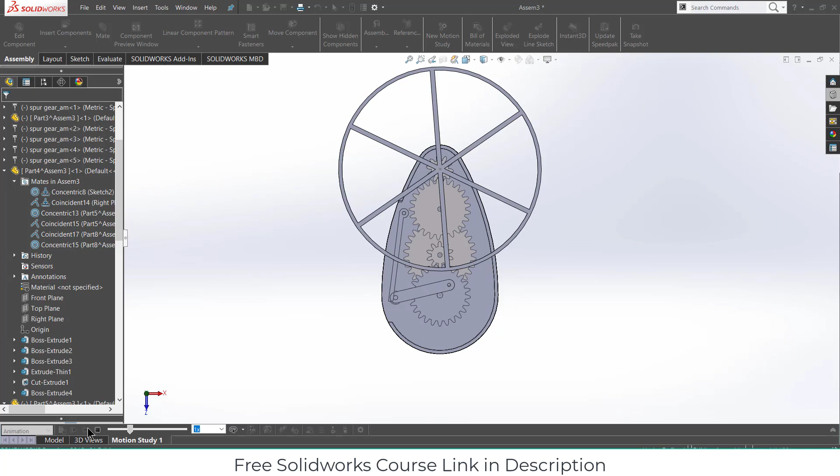Let's start. Click on design library, click on spur gear and drag it. I'm using a library that already contains all the gears. The first gear I'm using is module 2 with number of teeth 25. Click OK and click close.

Select this face, press Ctrl plus 8, go to the sketch, click on sketch, click on convert entities, press Ctrl A, press Ctrl C to copy the sketch. Click yes, click OK, exit the sketch mode.

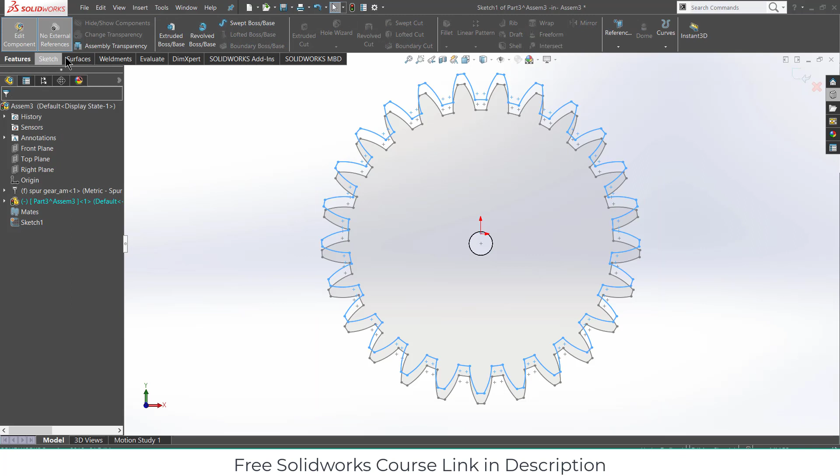Go here, click on new part, select the right plane, press Ctrl V to paste the sketch and extrude it up to 5 mm, click OK.

After that, go to the sketch, click on sketch, select this face and draw a circle here of diameter 5 mm. Go to features, click on extrude cut through all, click OK and delete the sketch.

Delete. So now we have two gears - one from the design library and another that we made ourselves. You might ask why I made this gear instead of using the library one. The reason is I'm going to do some modification to this gear, and if I modify the design library gear directly, it will mess up my whole library. That's why I'm not modifying the design library gear.

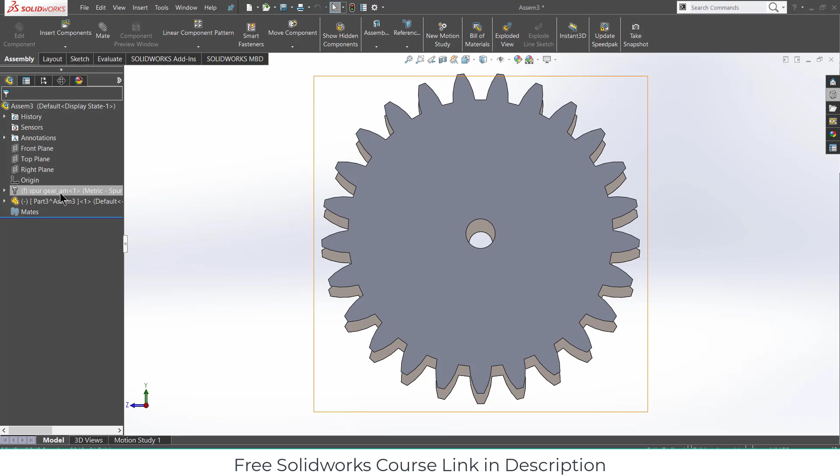So drag this part, and we are going to use this part from now on. As you can see, this part is fixed and cannot be moved, so right click on it and click on float, and now we can move it.

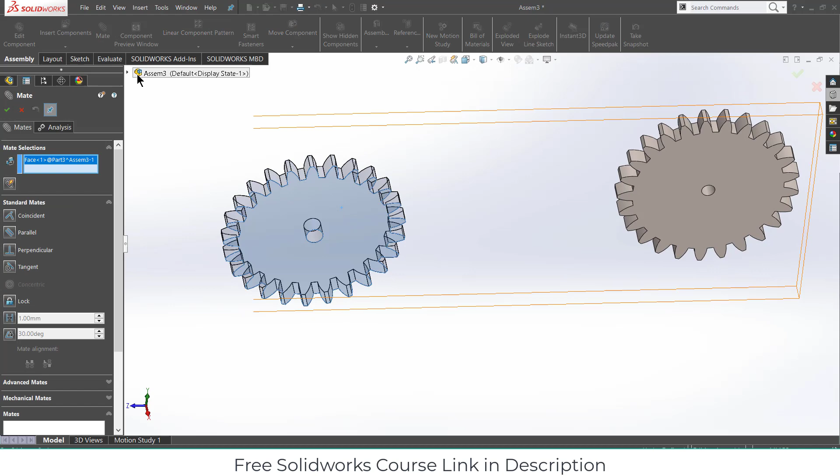Before I start making it, the first thing I have to do is go to the top plane. Select this face and select the top plane, click OK. Now select the right plane, press Ctrl plus 8, right click on it, click on sketch.

Before I start making it, I need to draw some lines that represent the axis of my different gears, so that when I do mating it will reduce my work. I need these lines importantly, because when I was trying to make this the first time, it was just a mess to do the mating work. That's the reason I'm making these lines.

Don't worry, I will tell you how I calculate the distance from here onwards. So this one will be 50 plus 20 divided by 2, which is 35. Okay, so that's for all.

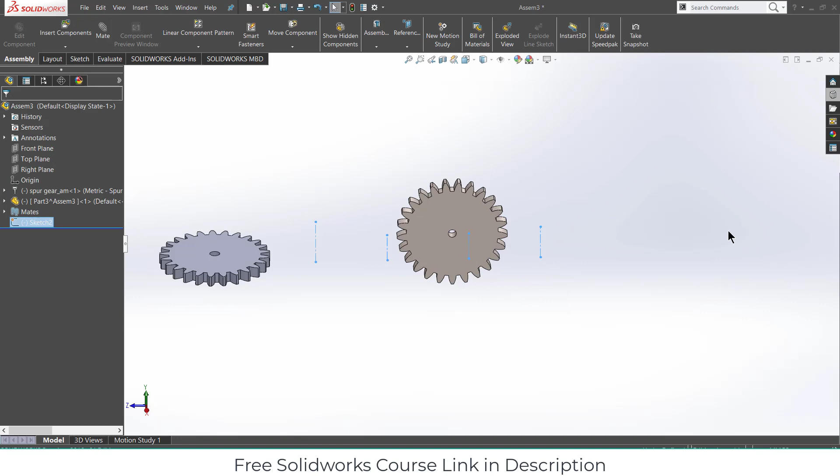Now let's start work on the mating. Select this face and select this, click on OK. Go here, right click, click on edit features, click on concentric, click OK.

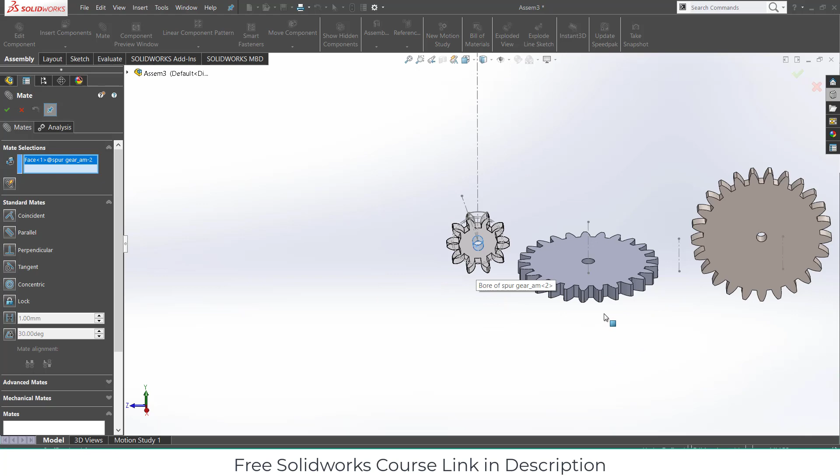Now what we have to do is make another gear. Go here, add another spur gear. This time the number of teeth on this gear is 10. Click on 10, click OK, close it, go to mates, select this face, select this one, click OK, select this face and this face.

Select this face, press Ctrl plus 8. As you can see, OK. Right click on it, click here and make it concentric. Click OK.

So move it here. Now we have to define the gear mate. Go to mates and check this, go to mechanical mates, click on gear, select this face, then select this face. Instead of diameter 5, we will enter the value of 50. If I try to do animation, yeah, it's very fine.

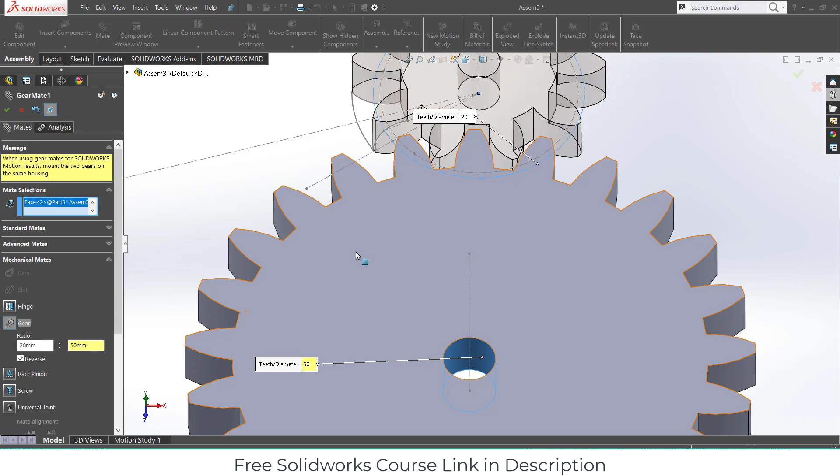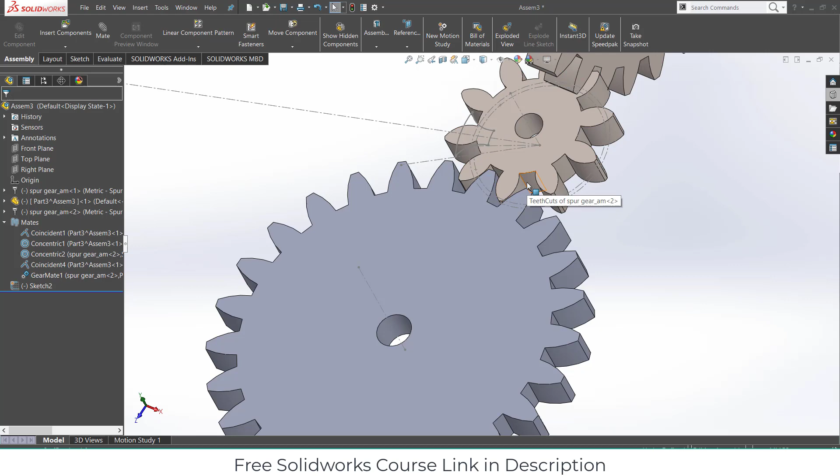Click OK. Now the question is how I calculate the distance. The distance formula is quite simple: it is diameter of 1 divided by 2, plus diameter of 2 divided by 2, so radius 1 plus radius 2. As we know the module of our gear is 2, this gear has 25 teeth, so its diameter is 50, and this gear has 10 teeth, so its diameter is 20. 50 plus 20 is 70, divide by 2 is 35, because I want the center distance, not the whole. It's just simple math, nothing out of the blue.

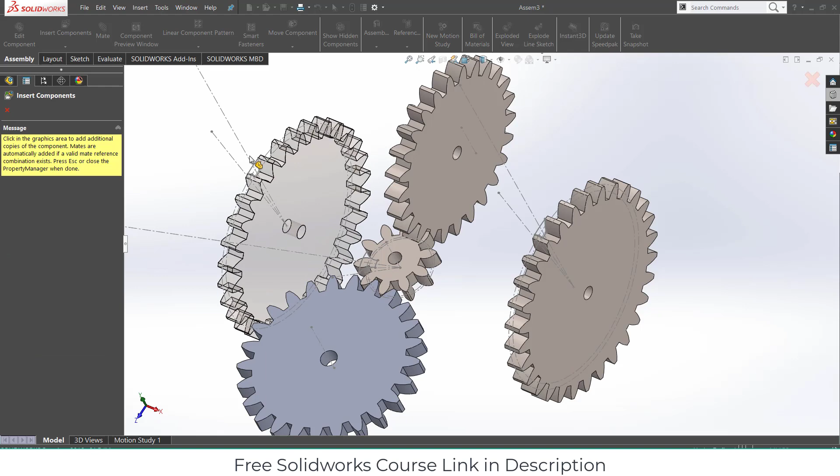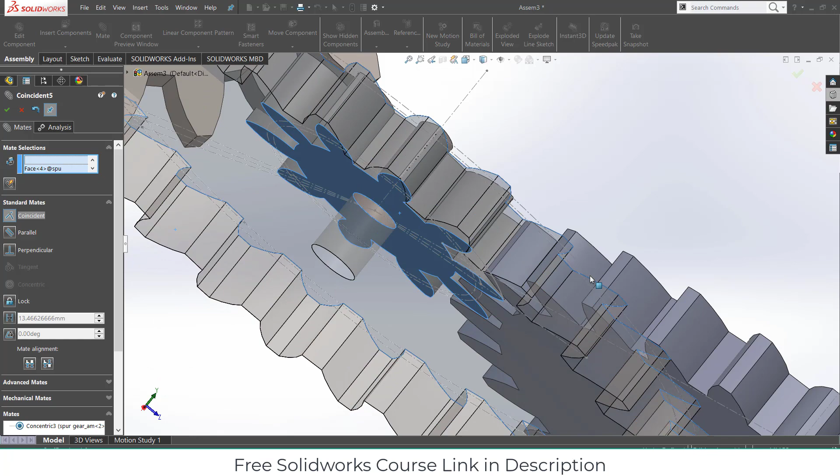Now go here again, drag and drop. This time the number of teeth on the gear is 30, and make sure the face width is 5. Close it, go to the mates, select this gear, and while mating this, make sure you click on lock rotation. It is very necessary. Click OK, drag and drop it down, select this face and this face, click OK.

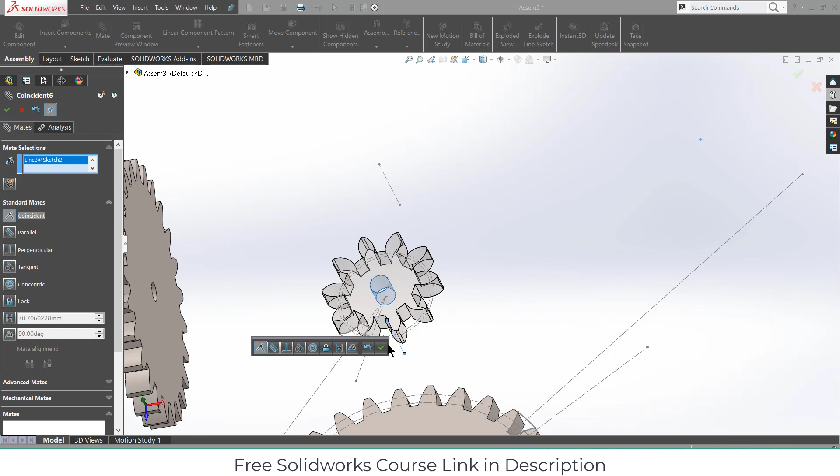After that, we need another gear with 10 teeth. So instead of dragging there, simply press Ctrl and left click on your mouse, drag this gear, and move it aside for a bit because we don't want it yet. Go to the mates, select this gear, select this gear, make sure you use concentric. Click OK. Select this face and this face, click OK.

Select this face, press Ctrl plus 8, go downwards and rotate it. Now go to the mates, mechanical, gear, select this and this. Just when you try to do mating, you might not see this sketch in your design assembly.

So how can you bring it up? First click close. What you need to do is select this gear and go here, click on tooth cut, right click on it and click on show. As you can see, it is hidden now. If I right click on it and click on show, it is showing. So this is a very easy way to do gear mating, and it works quite well in most cases.

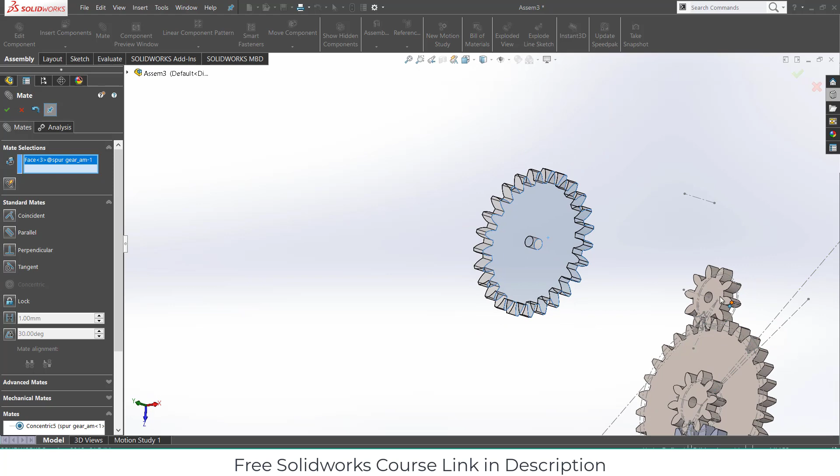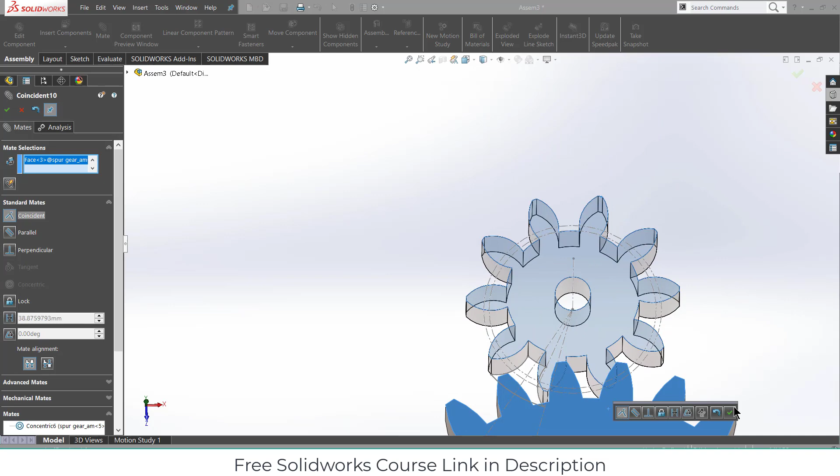Go here, mates, select this and this one. Make sure you click on lock rotation, click OK, select this face and this face, click OK. Now I need again a gear with 10 teeth. By pressing Ctrl and left click on mouse, drag it, go to the mates, select this one and this one, click on concentric, click OK, select this face and this face, click OK, move it, rotate it a little, click OK.

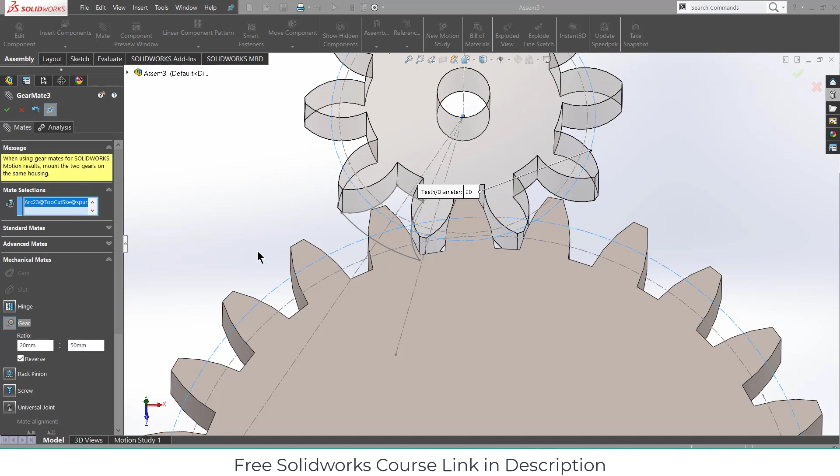Select this gear, go here, tooth cut, right click, click on show, go to the mates, select this one and this one. Sorry, first go to the mates, click on gear, just check a bit that it is working fine. Yeah, it is working fine, click OK. Now hide these unwanted sketches because they are just an unwanted burden, and select this one, right click, hide. This done.

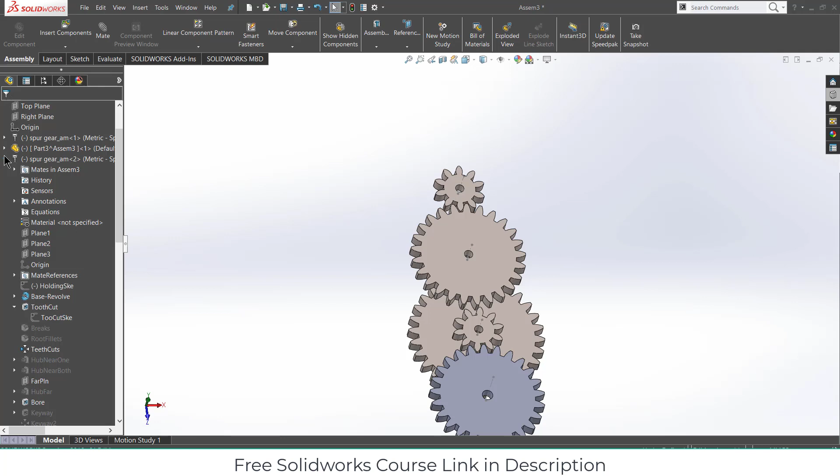So we have made all the gears. Now the next thing we have to do is make the covering of this, and after that we will work on the mechanism. So go here, click on new part, select the top plane, press Ctrl plus 8. Let's see how we approach this problem.

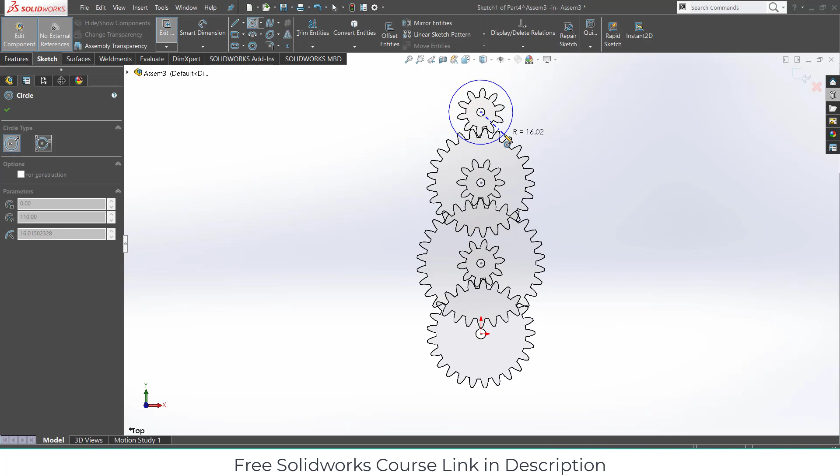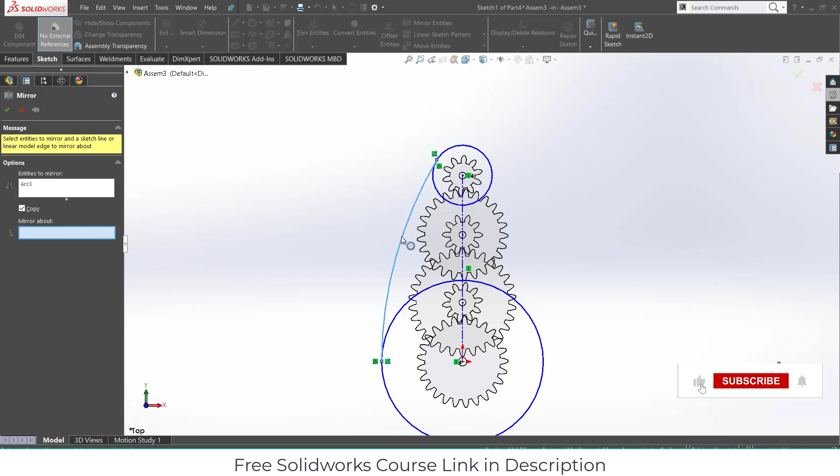Go here, draw a circle here, draw a circle here as well, select this, and instead of that we will use an arc, it's better for this. Escape, select this and this, make it tangent, select this and this, make it tangent, and select this point and this point, select this one and this one, make it vertical. Mirror, select this and mirror about this line, click OK, go to the features.

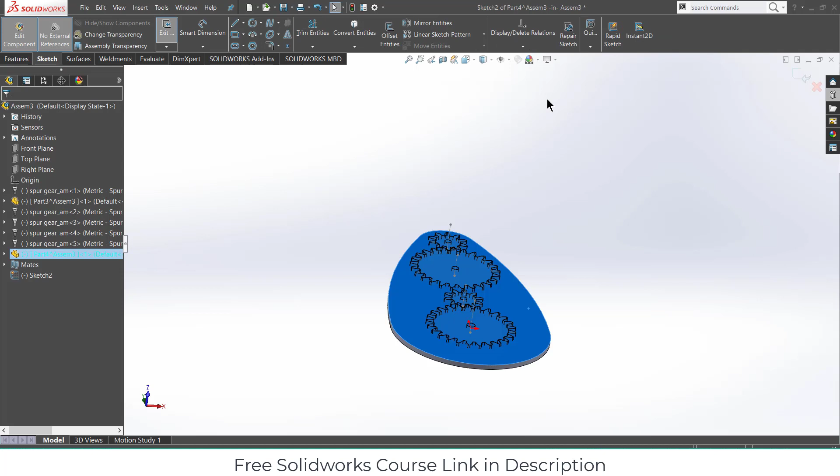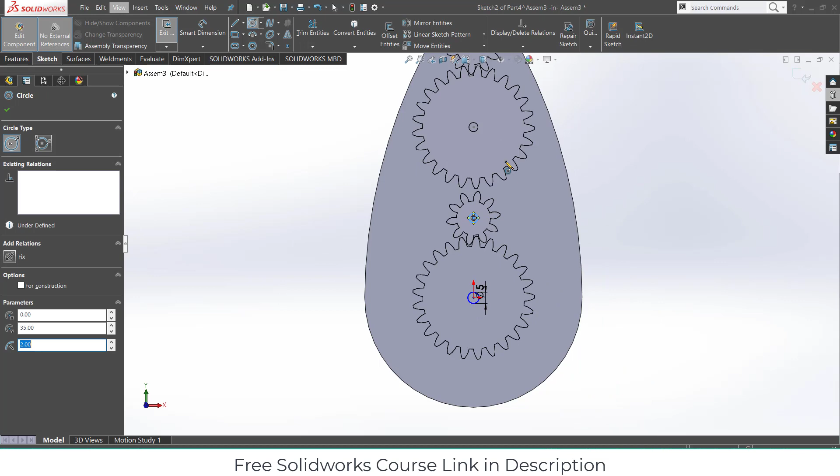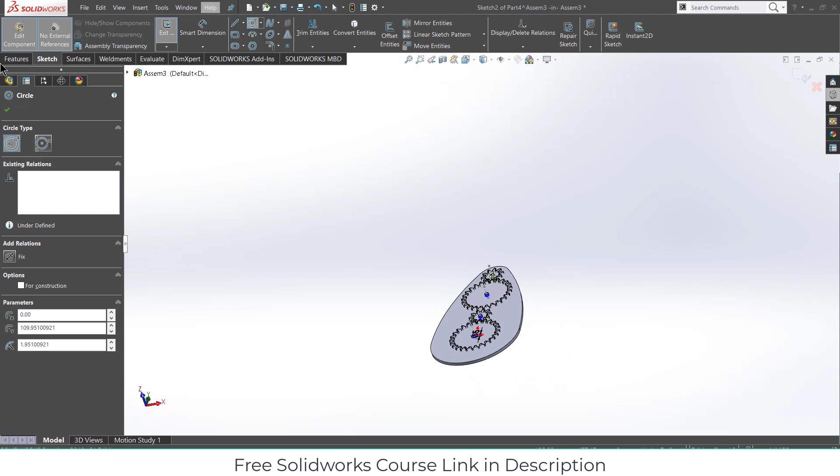3 mm, click OK, and after that select this face, right click on it, click on sketch, press Ctrl plus 8. So we have to make the pins here, so 5 mm, and go to the features, extrude up to 20 mm, 20 mm. 20 mm is too big, make it 10 mm, sorry. Edit the existing component mode and drag it downwards.

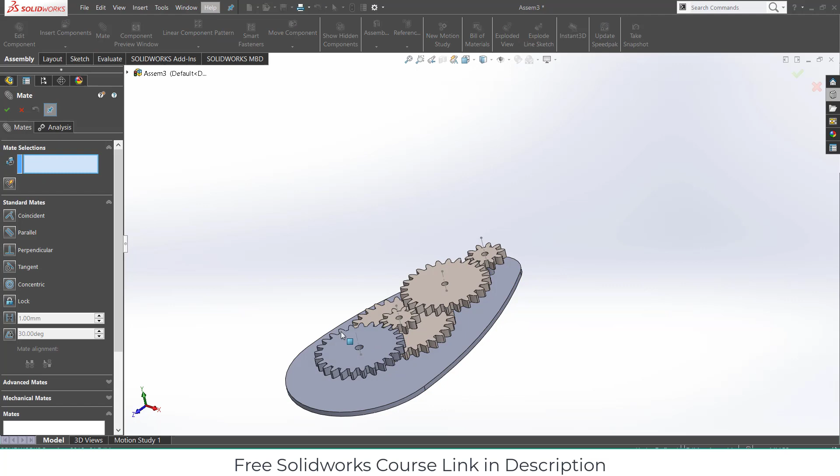Go to the mates, select this face and this one, make it concentric, click OK. Similarly select this face and this one, make it concentric. Okay, it is not doing concentric.

Now we have to make the outer body of it. Select this gear, click on insert components. Before I make it, let's add more things here.

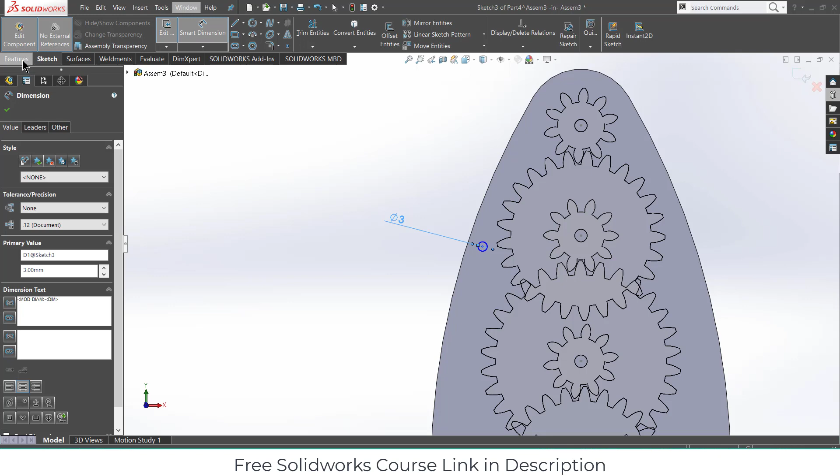Draw a circle here, 3 mm. Go to the features, extrude up to 10 mm, and select this face, click on sketch, press Ctrl plus 8, and select the outer edges by pressing Ctrl.

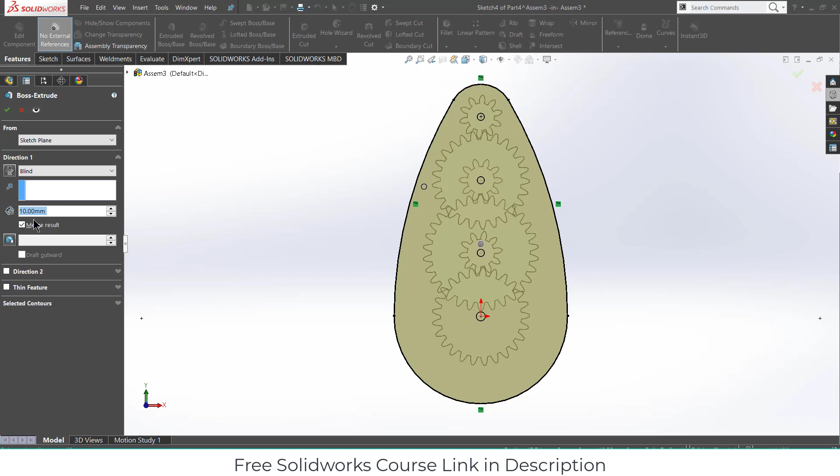Click on convert entities. Select this one, convert entities, extrude, thin feature, 3 mm, direction 2, 3 mm, click OK.

Press Ctrl plus 8. So just so you know, we are going to delete some areas here because we want some rotation here. So let's see how we can approach it.

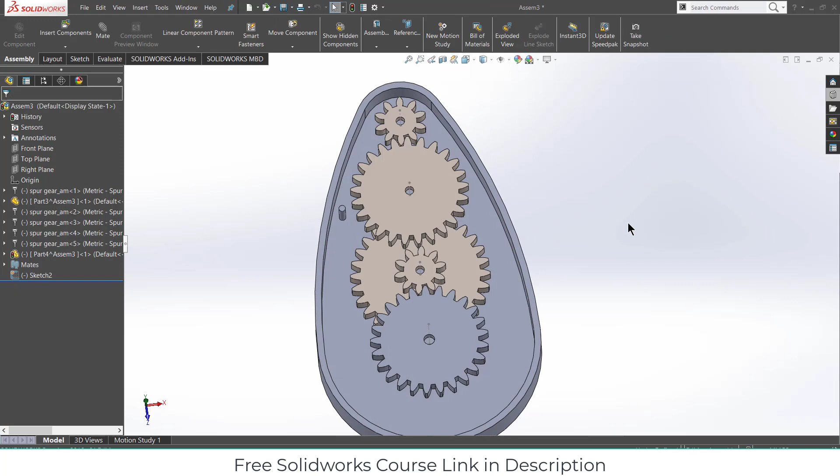Edit assembly component mode, select this face, press Ctrl plus 8. After that go here, click on new part, select the top plane again.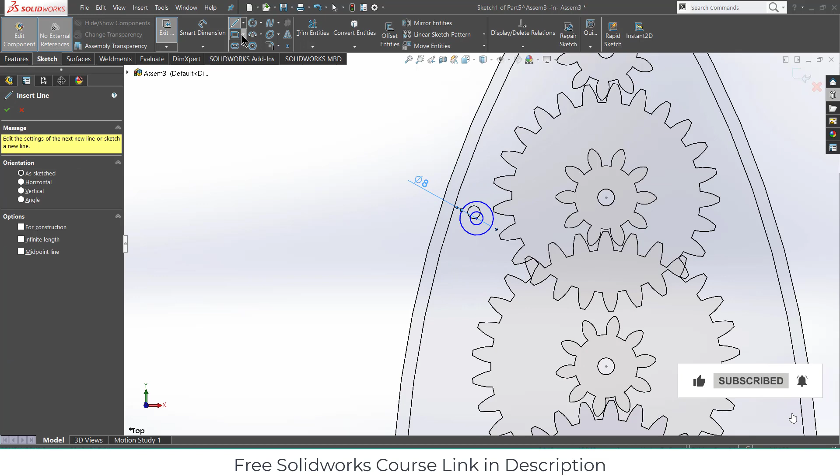So what I can do is go here, click on parallelogram. Select this point and this point, and to this point.

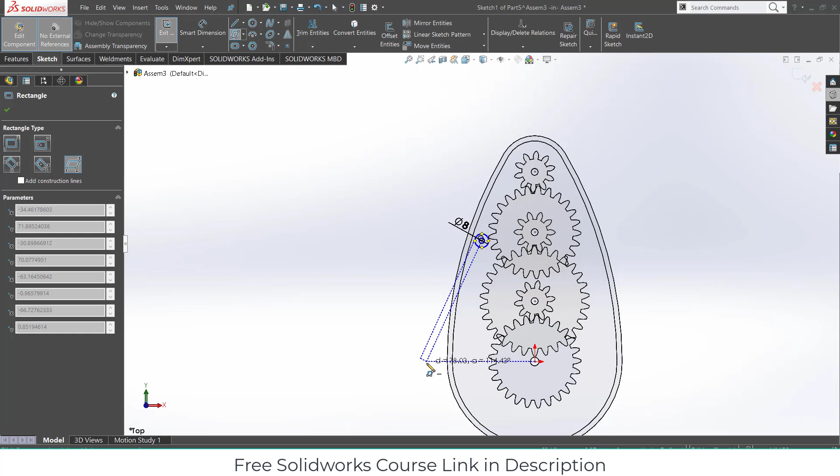Go to the features, click on extrude, select this face and this one, click OK. Select this face, click on, press Ctrl plus 8, click OK.

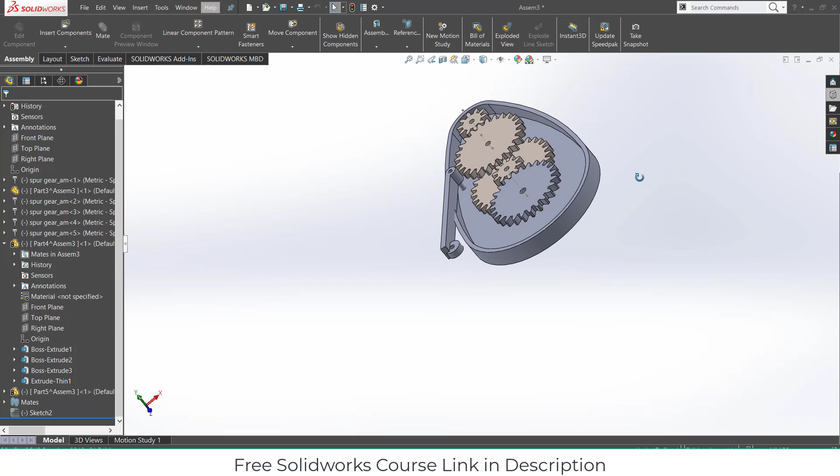Select this gear, click on edit components. Just remember that this gear is made by us, it is not from the design library, so you can do modification on it. So select this face, click on sketch, press Ctrl plus 8.

So draw a circle here, smart dimensions 3 mm. Select this and this, make it, press escape, select this point and this point, make it horizontal first, press Ctrl Z. Forget about it. You see that the gear has x and y axis, so if I try to do horizontal it will move down here. So this is what I want.

So go to the smart dimensions, make it 12 mm, go to extrude cut through all, click OK.

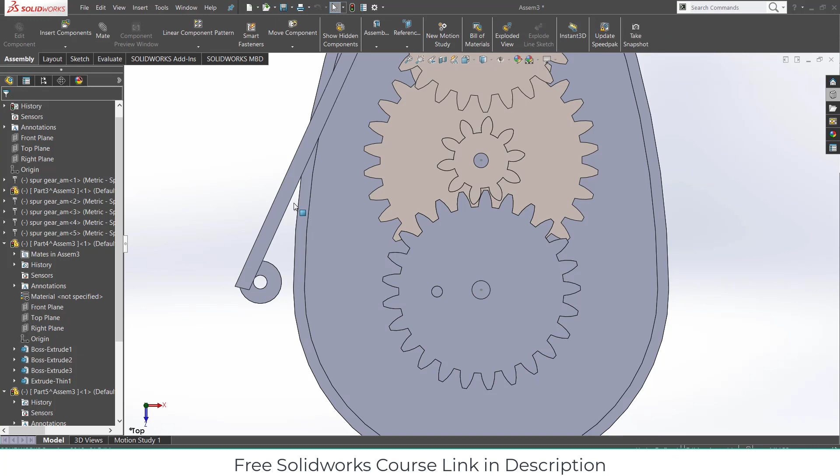Exit, there's some component mode, click on here, click on new part, select the top plane. So this is going to be our last part—not the last part, sorry, we are still going to make more parts after that.

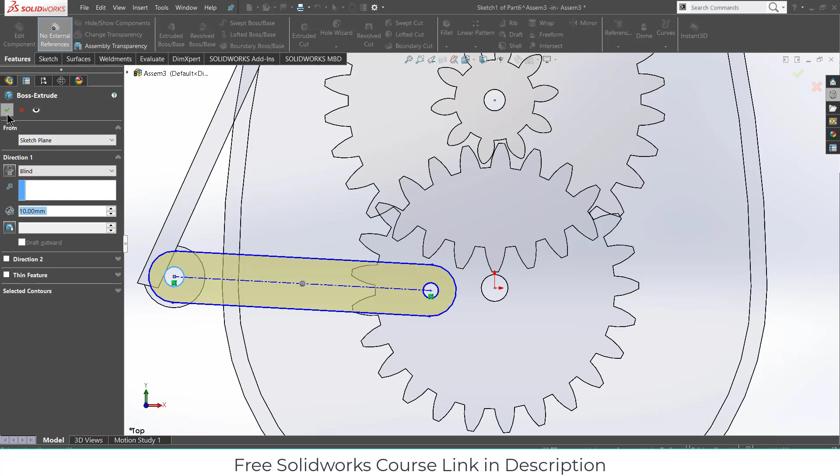10 mm, okay, exit the assembly component mode. Now we have to do some matings. Oh, before we do mating, click on here, and we need to control this extrusion.

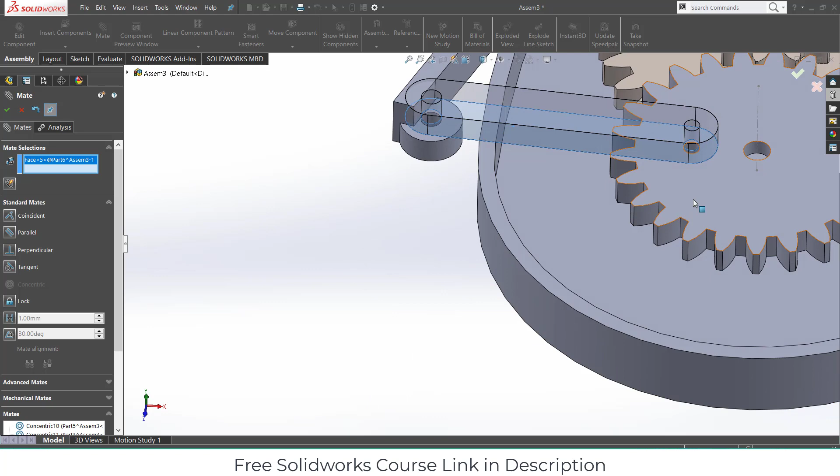So let's see, first of all let's see whether it's working or not. If I try to rotate it, okay, I have to go to the assembly, mates, select this face and this face.

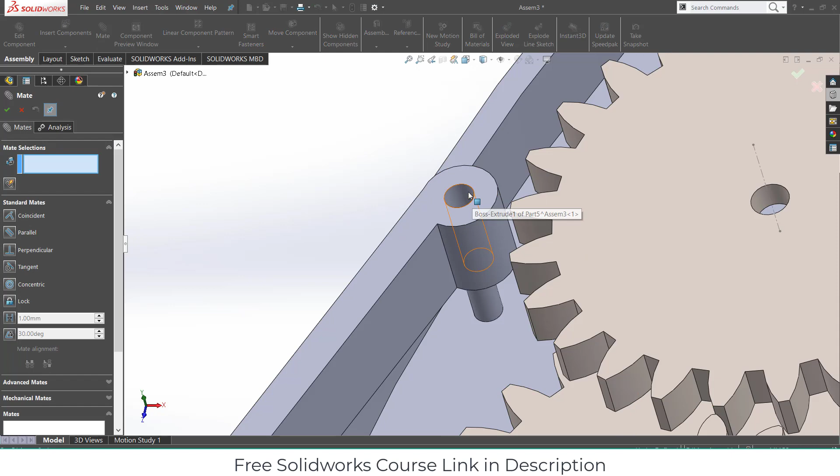One more thing is that it is rotating as well, so we have to control it. Select this one, let's see, select the right plane, go to the mates and select the right plane of the assembly, click OK.

So if I try to rotate it, as you can see, it's working quite great.

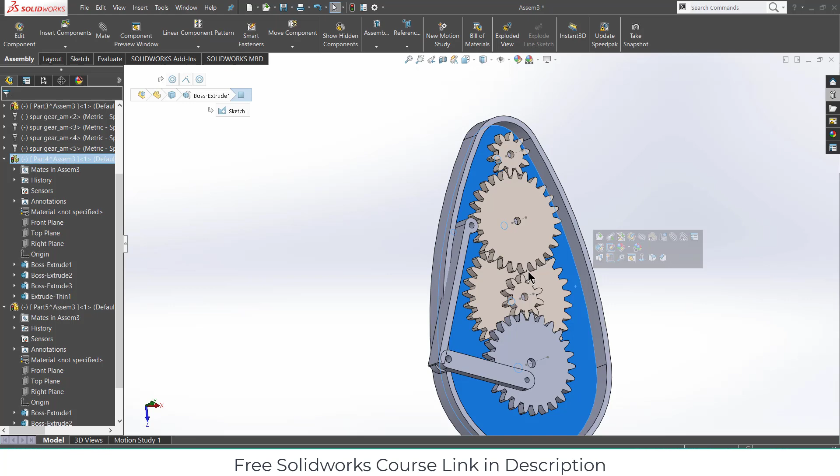Now one thing we have to do is delete this unwanted area, because as you can see they are interfering, and here also there's interference. So we have to delete it. Select this one, click on edit components, select this face, click on sketch, press Ctrl plus 8.

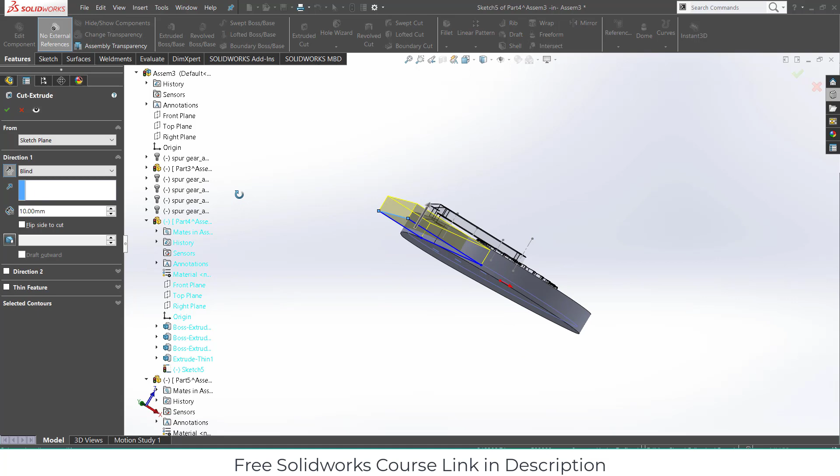There are a thousand ways to do it, again it's up to you how you want to delete it. Extrude cut, reverse direction, click OK.

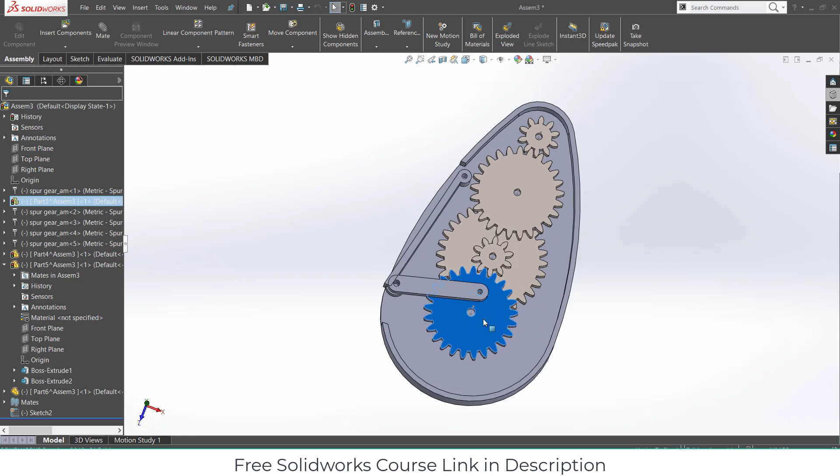So this looks great to me. Now we need a covering of it, so we will make the cover later onwards. We need a fan on top of it. Fan work, I think anybody can make, but still, I'm making a tutorial, so I will make it.

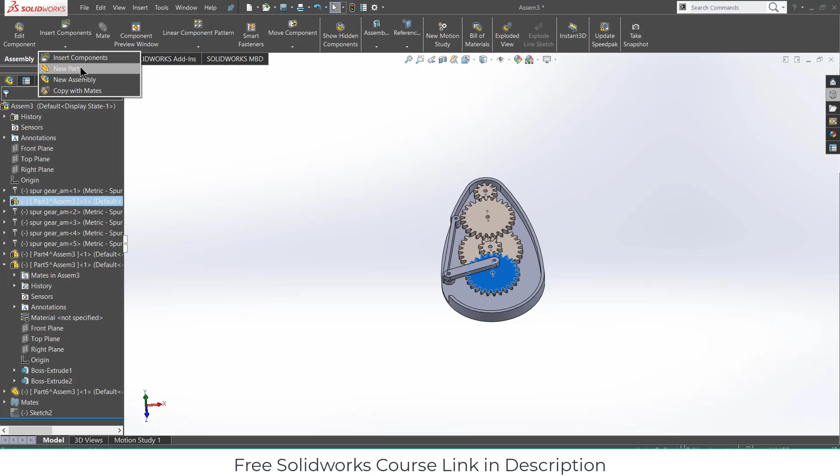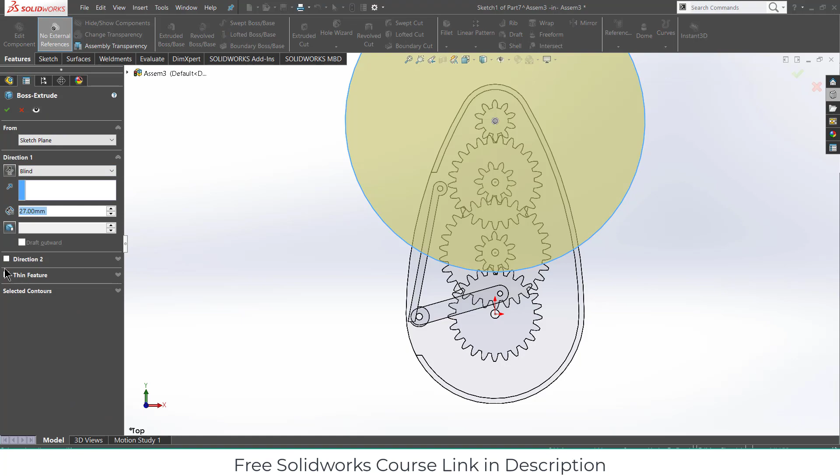Click on here, new part, top plane, press Ctrl plus 8, go to the features, extrude it, thin feature. Why is this error popping up? I will see later on why this error is here.

Okay, so we need one more. So select this face, click on sketch, press Ctrl plus 8.

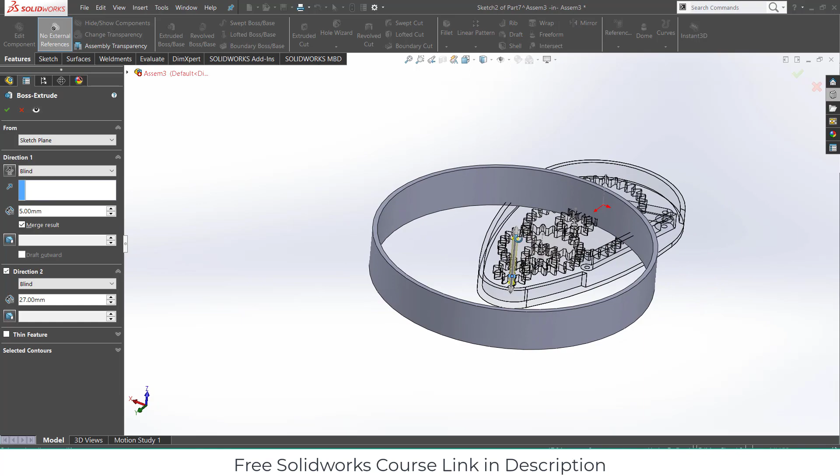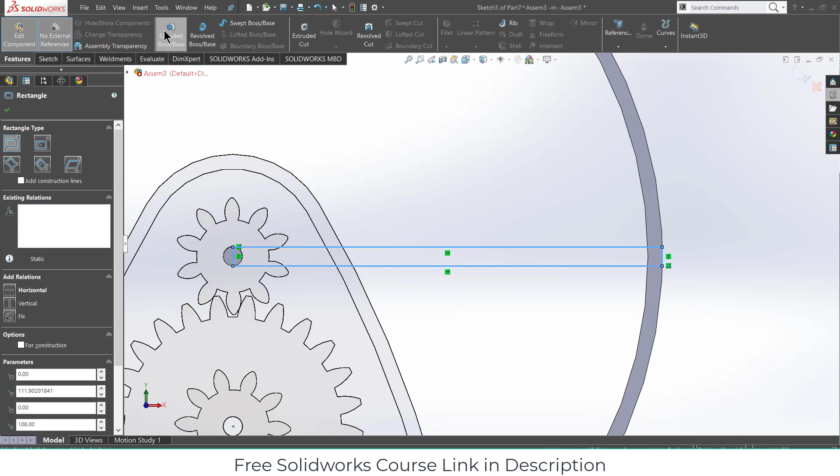Okay, reverse direction, 10 mm. You can make it an inclined angle as per your requirement, but I'm not making it inclined. My main aim is just to show how to make it. Okay, so increase, click OK.

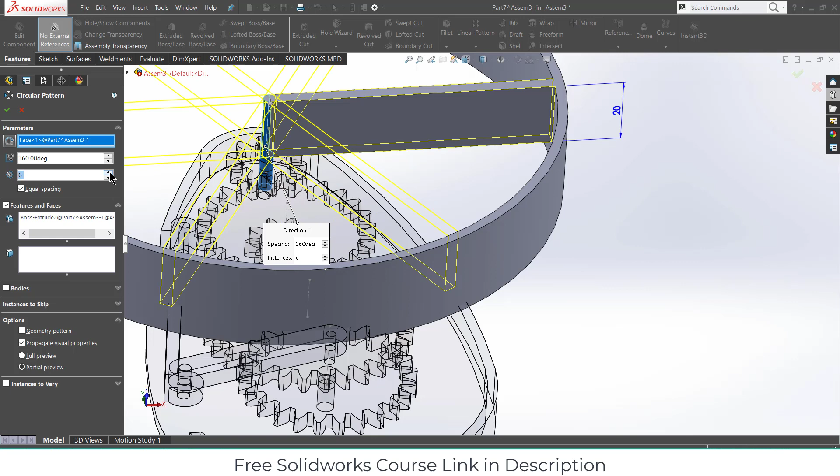Exit component mode. Okay, now let's see where is the error. One of these entities may suppress and no longer exist. Why?

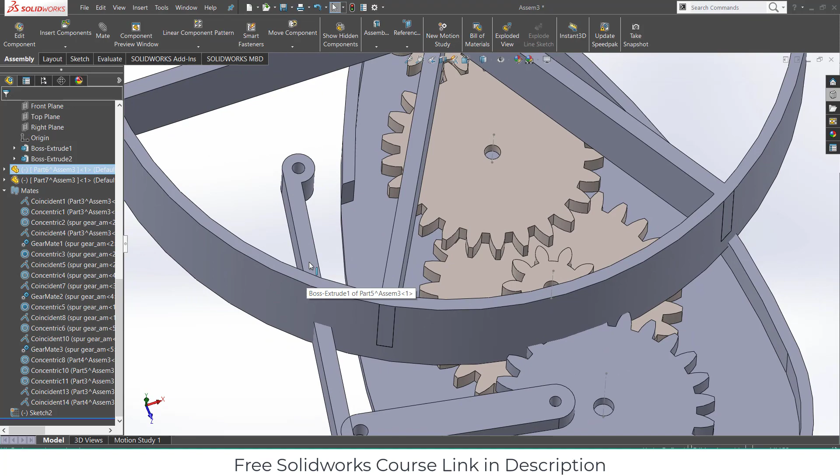Delete that. Okay, actually the sketch is deleted from here, so that's the reason we got the error. So press Ctrl Z again. So we have to make a sketch here. Go here, click on edit component. Remember the cut that we have made, so because of that cut, I accidentally deleted the sketch here as well. That's the reason I'm getting the error. So that's the important thing, that you know why I'm getting the error and how to resolve it.

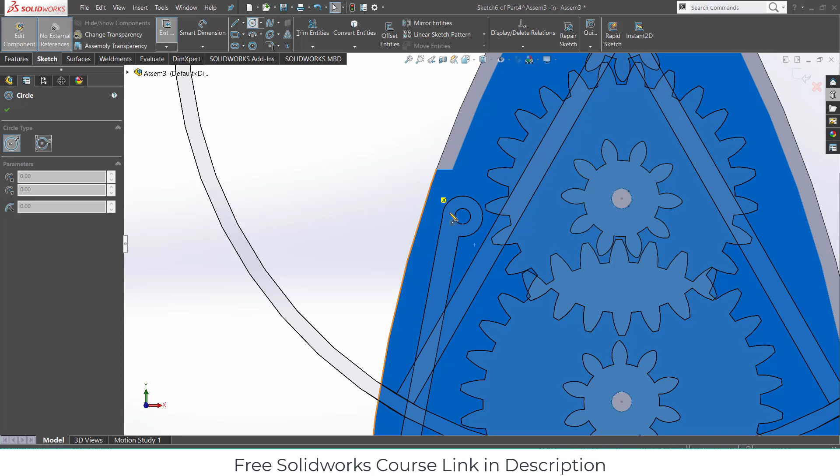10 mm. Now go to the mates. Select this and select this one. Click.

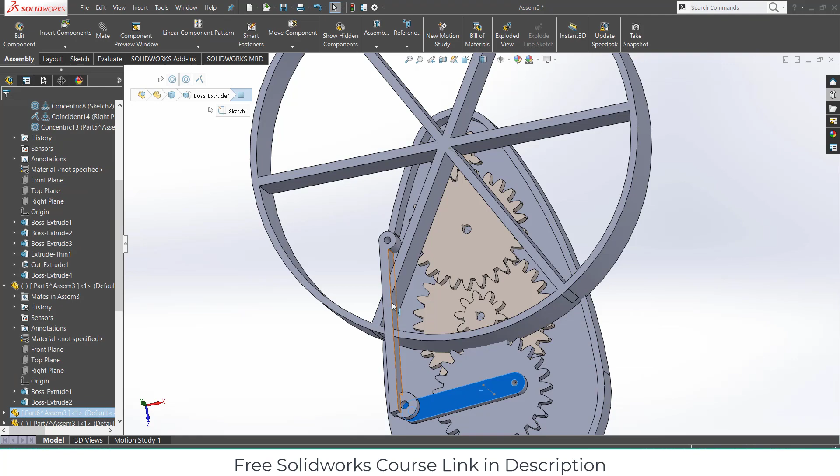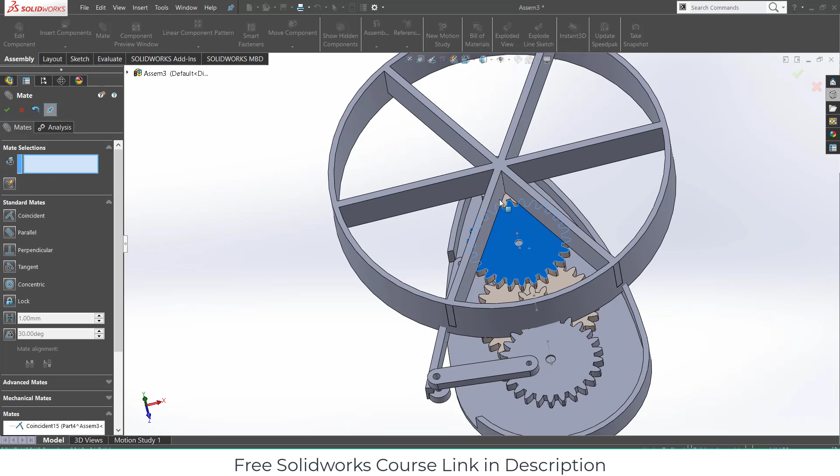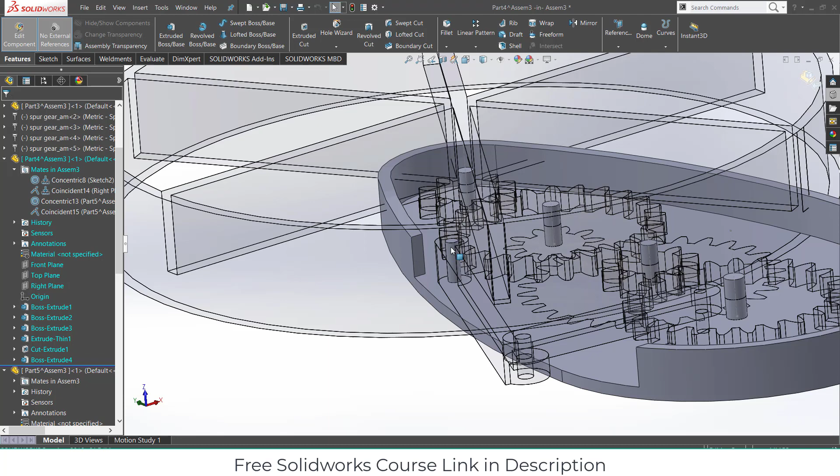Select this gear, click on edit, right click, features, rebuild it.

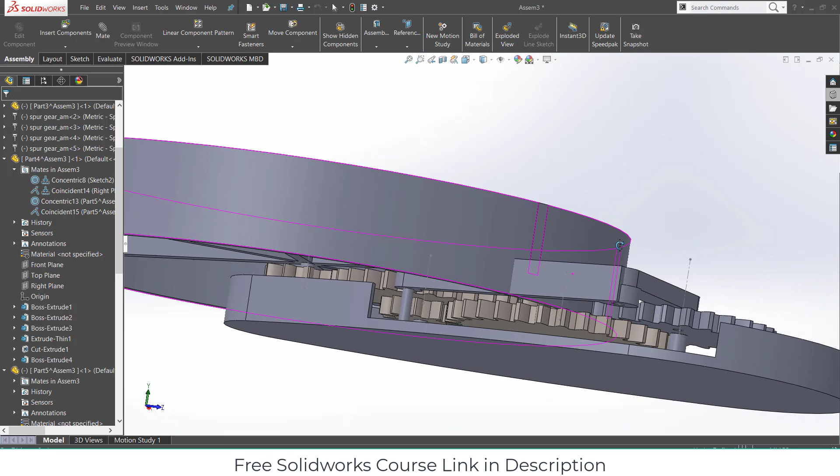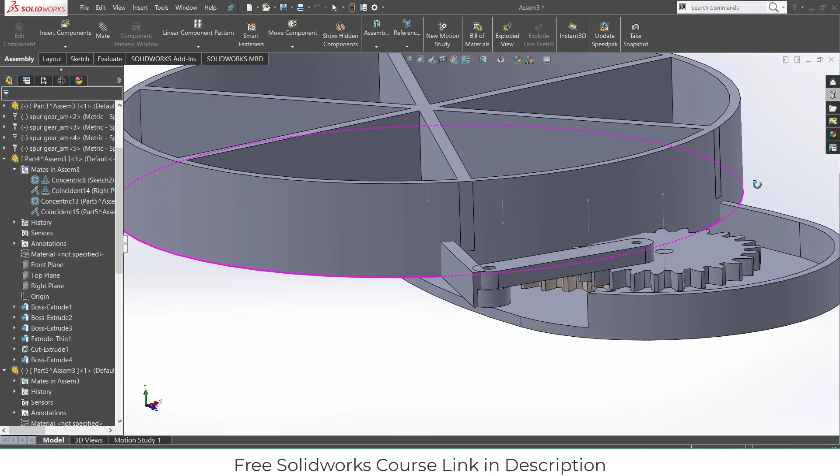15 mm, I guess I made it too big. Exit it. Move this upward. So if I try to, as you can see, it's working fine.

Now let's do some other mates. Go here, select this face, click on lock rotation, click OK, and move it downward. I guess up to this is fine. We can add some mechanism here if you want. Okay.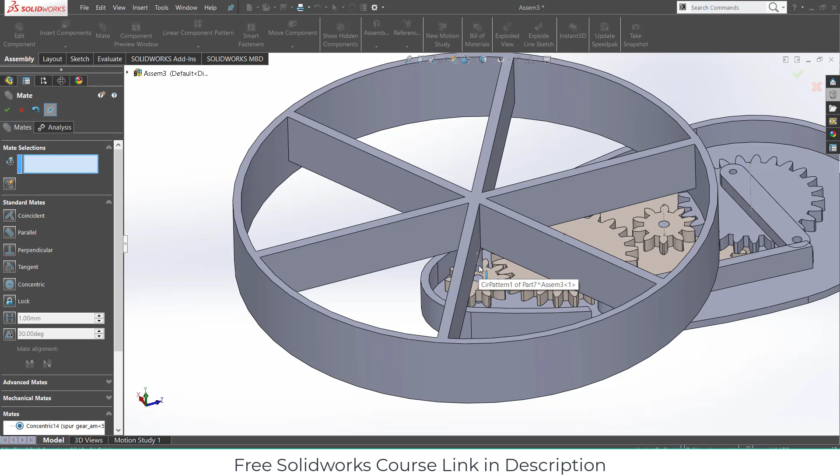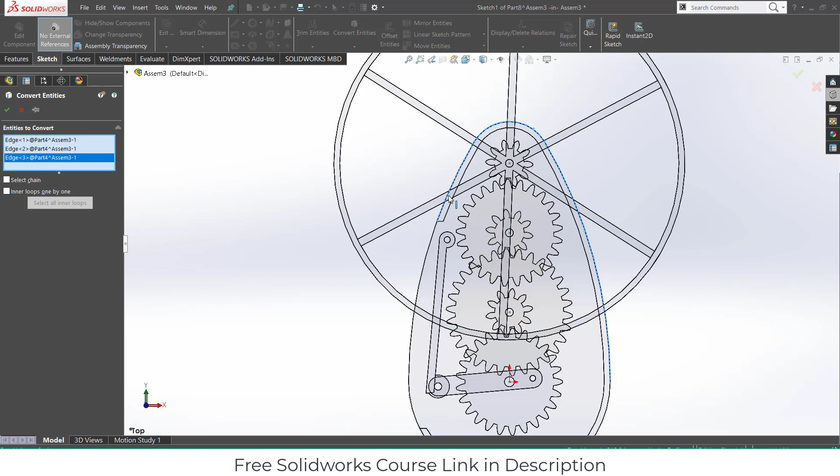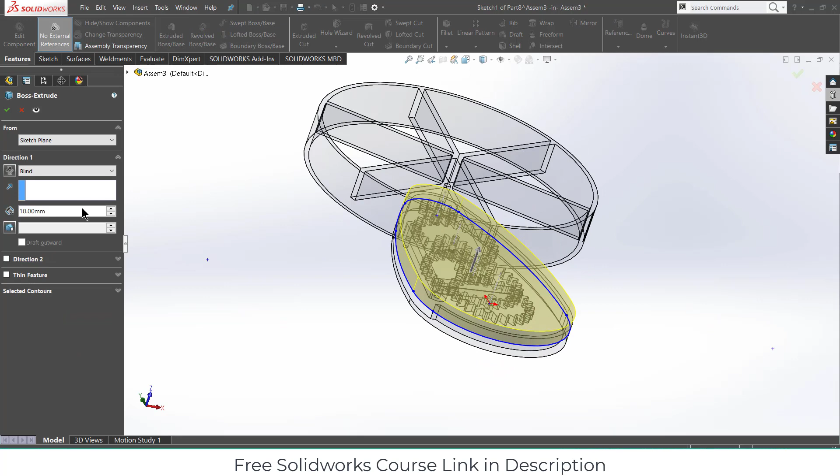Now we want to cover all these things. So what we can do is click on here, click on new part, select the top plane, press Ctrl plus 8, click on convert entities, select this edge, click OK. OK, don't show again, click OK, extrude it, 3 mm, click OK.

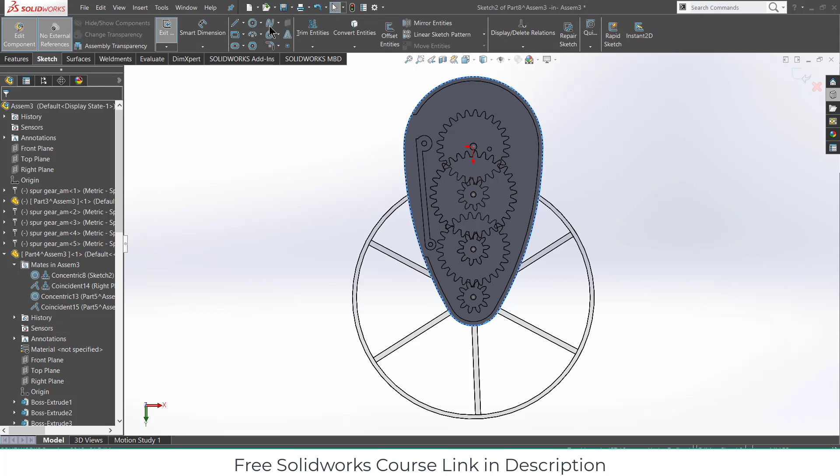Select the bottom of the face, click on sketch, press Ctrl plus 8. Again by pressing Ctrl select all the edges, go to the features. Okay, I have to first convert the entities. Now go to the features, extrude it. Thin feature is 3 mm, inside it, let's make it 5. Okay, exit component mode.

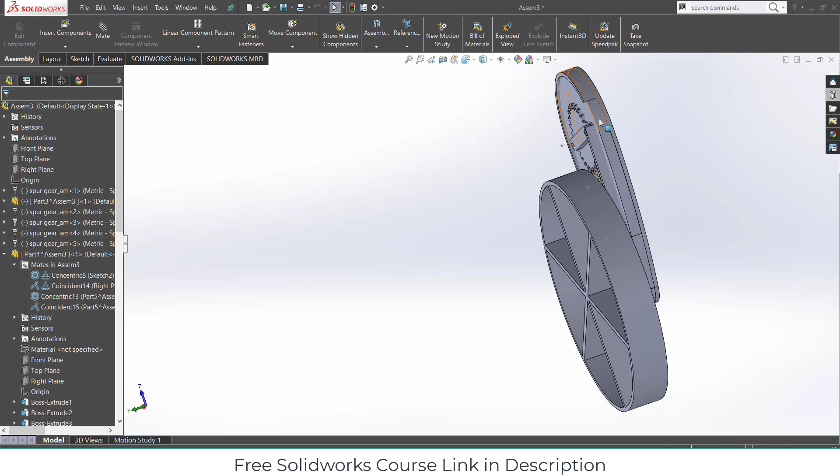As you can see, it is quite tiring.

Select this face, click on go to edit assembly, select this face, click on sketch, press Ctrl plus 8. We need to draw a circle here so the hole is going through it. Extrude cut through all, click OK.

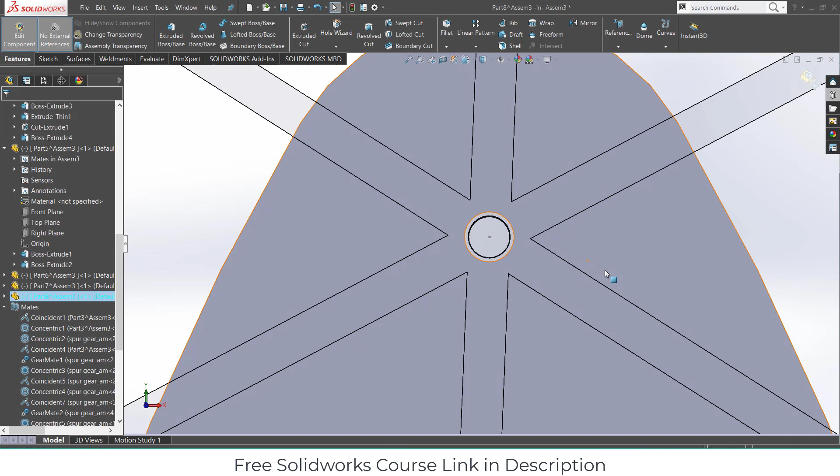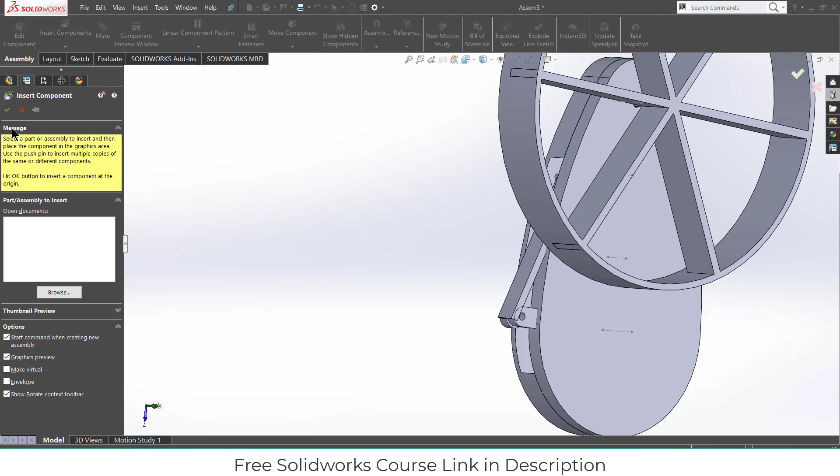And we have to delete some area here, so what we can do, select this part, click on edit component, select this part, edit components, select this face, click on sketch, press Ctrl plus 8, extrude cut.

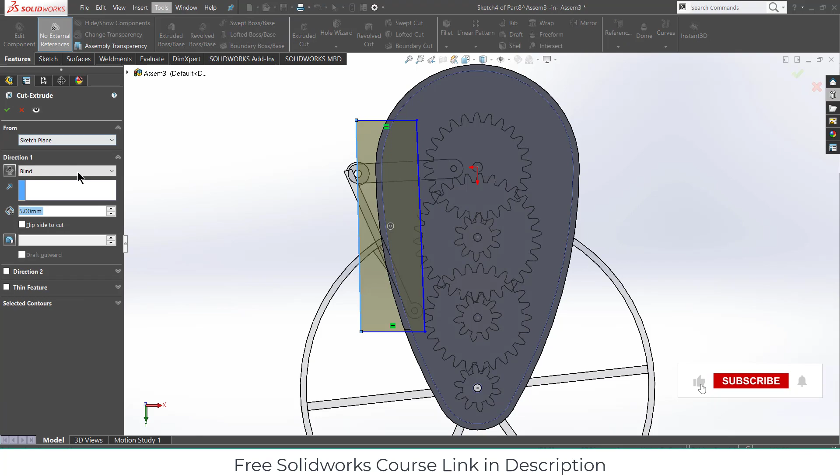Scroll. Right click on it, click on change transparency so we can see what's inside of it.

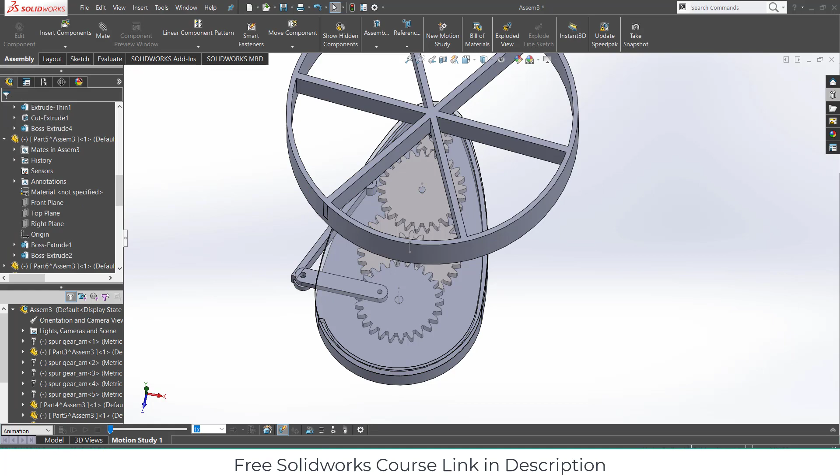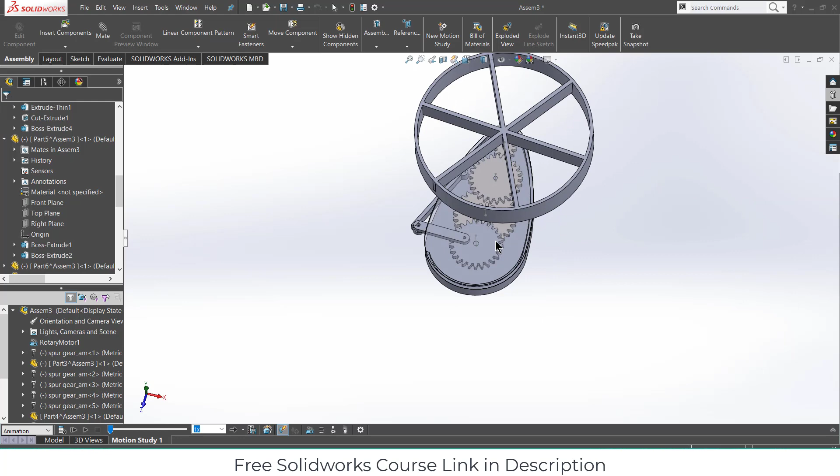Click on calculate. It is currently calculating, so that's the reason it looks quite laggy. Now simulation is done. Now this is how it looks like.

Right click on rendition, disable it. Click on play. As you can see, animations still look quite good.

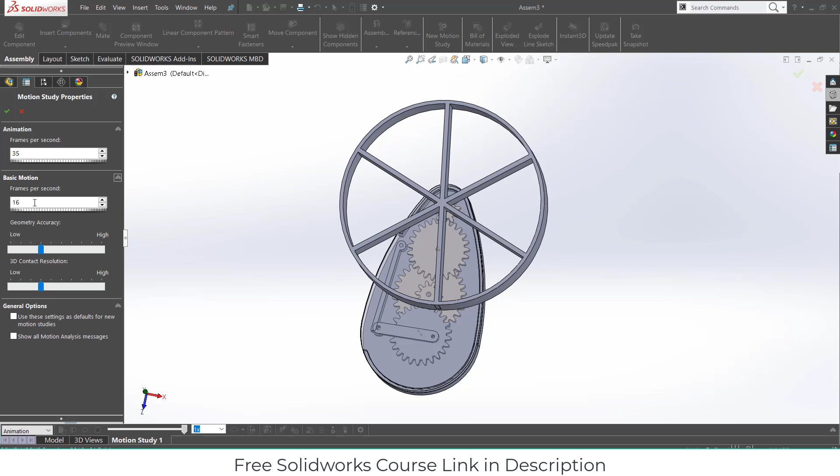So one way is that you either save the animation, okay, because it's basic motion. One way is that you save the animation, but again it will take a lot of time to save the animation and do all the things. Okay, so in that way you can make this animation. And the reason the animation is lagging is because I have a low spec PC, not a high spec PC, so it lags on my computer. So you need a high spec computer to see a smooth animation.

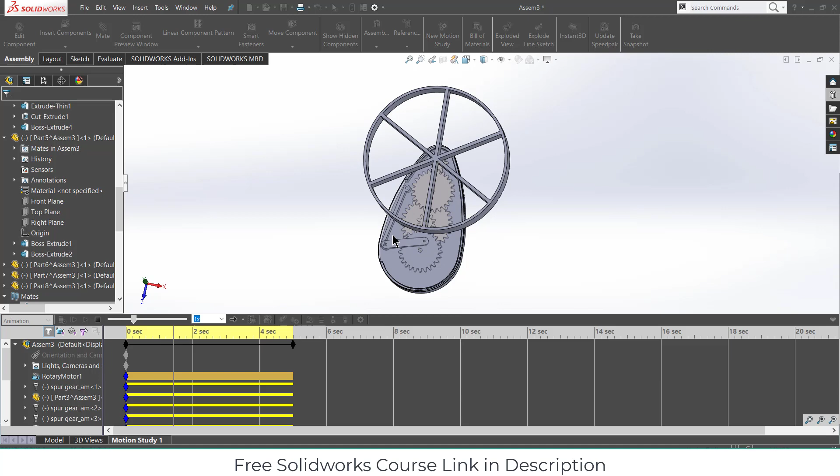Okay, here you can see it looks like it is anti-rotating, but no, it works fine. But due to me having a low spec PC, it looks like that. Okay.

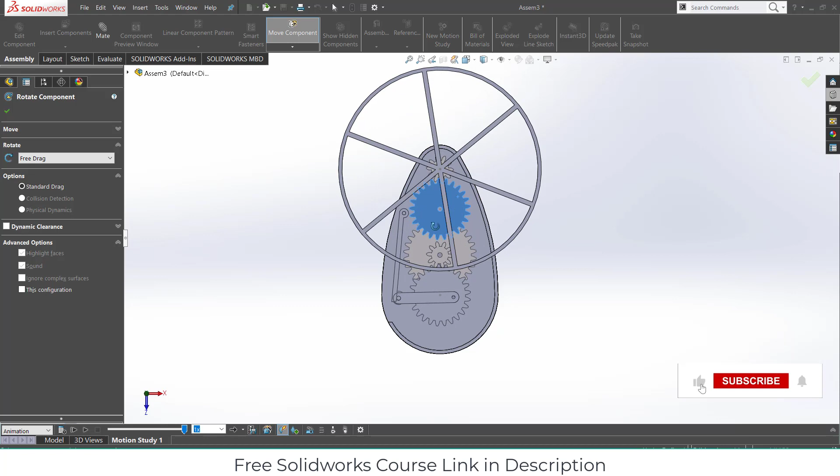As you can see the animation now, it's working. Now it looks great. Okay, now you can see the animation is working fine.